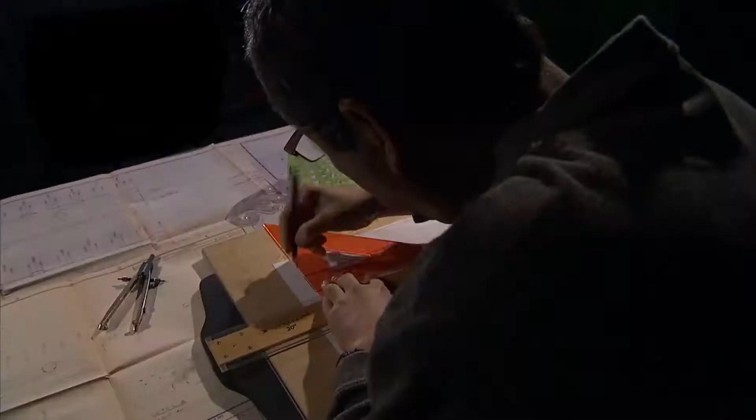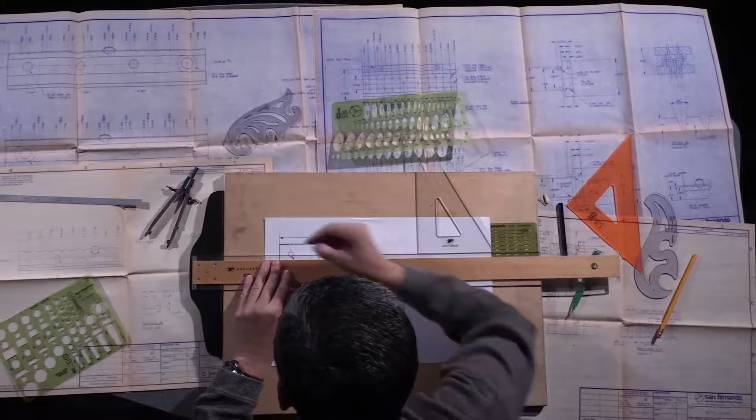Back in 1980, my mother wanted me to have a career, and I just didn't know the path to how to go about it. So what she did is she paid for me to attend a vocational school of mechanical design and engineering. Although not an engineering school, it taught me the basics on how to do mechanical drawings.

My name is Kelvin. I was born in El Salvador, Central America. My father came from China. I'm a total mutt. In El Salvador, they had the Civil War. My mother decided to bring my sister and myself out of El Salvador to live in New York for a better life.

Once I broke the news to my mom that I work in NASA, she was incredibly very excited.

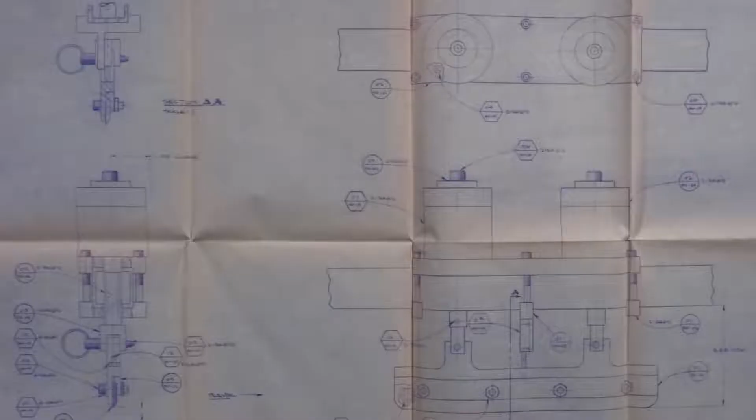I remember one of my professors saying that a drawing is a means of communication between an engineer and the fabrication shop. Good morning, sir.

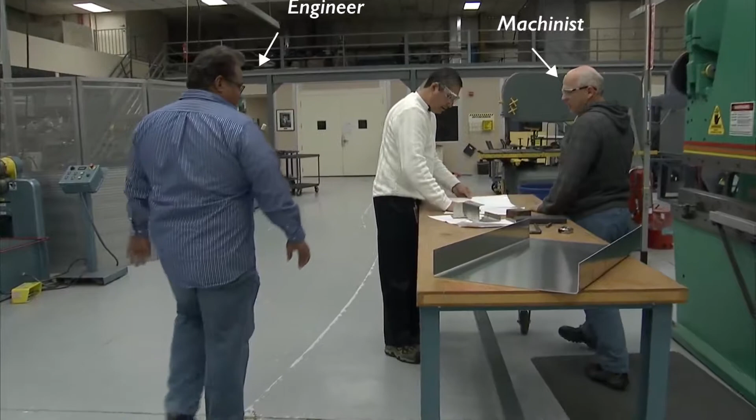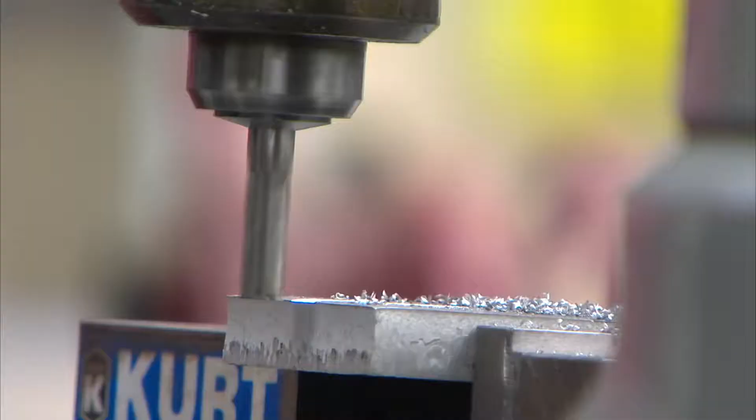My job is to make sure that we speak the same language, that it is clear and concise, and also that the engineer is clear in his intent of the design, and that the shop is clear in what needs to be produced for that design.

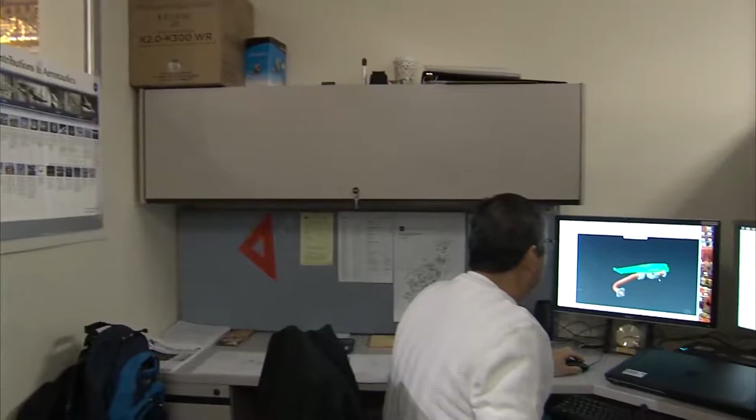The drawings that I produce vary here. Some are cabinets that go into the airplanes. Others are just fixtures that go outside. In this particular project, this is a fuel line meter that is going to be put into the G3 airplane for the flex wing. It measures accurately how much fuel it uses at any given time it goes up in the air.

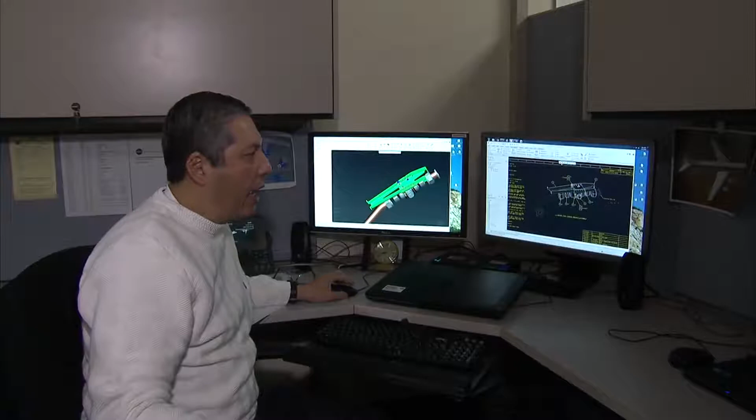The engineer designed the bracket. Once he did the 3D CAD model, he gave it to me, and I produce all the drawings on this side. My responsibility is not only to do the drawings of the assembly with the bill of materials on the side, but also do the parts, every single part that is to be in that drawing, and dimension it and make sure that everything is correct.

An engineer will do the design. After he completes the model, he will give me that model, and I begin putting all the parts into the drawing, doing the dimensions, making sure that it matches the NASA standards and the ASME mechanical standards. After I am done with the drawing, I return it to the engineer to be checked.

Once a drawing is approved by the engineer, I send the drawing to configuration management. They do a couple of things. One is that they will release the drawing into the system so the engineer can write a work order to have the design built by the machine shop. Second, and very importantly, they are the single repository for AFRC, where they put the drawings and the CAD files into their system for safekeeping. If an engineer later needs either the CAD files or a copy of the drawing, they will call them to get a copy.

A typical day here when I come to work is I come in at 7 o'clock. So back to the 3D. Usually on Tuesdays, we have a meeting at 8 o'clock in the morning with my manager just to review all the projects, where they are, where they're going, and what the due dates are.

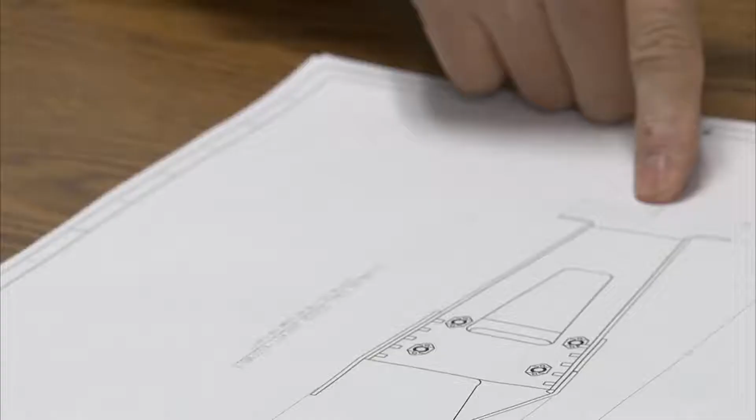All right, Kelvin, what do we got here? Okay, so we get this completed here. So we want to take a look at it. It's going to be passivated. I put this overall dimension here. So, but you want to know more dimensions between center holes. Or just from horizontal? No.

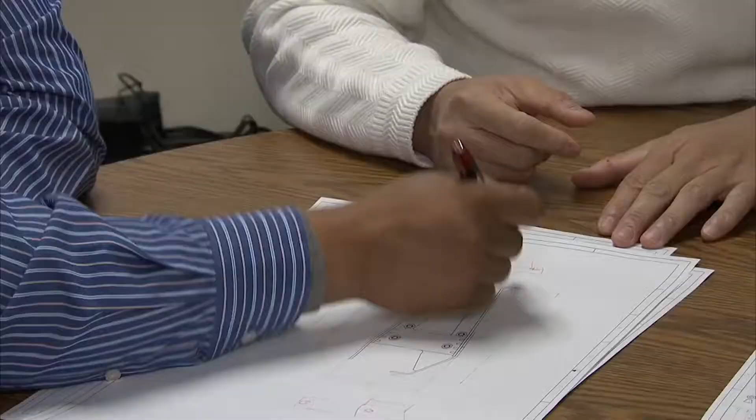After that, I just go about my business of working for the engineers and working on their projects and making sure that the timelines are met.

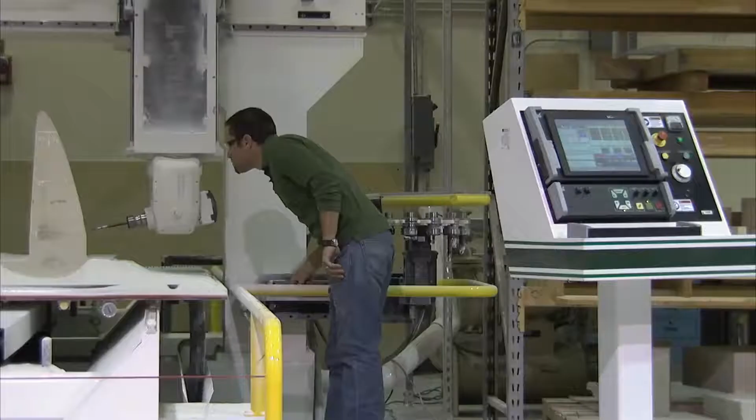What I like here that is different from the private sector manufacturing is that every piece we make here in NASA AFRC is a prototype, it's one of a kind, and I truly enjoy that. One reason is because there's only one of a kind. And second, because it's not mass produced, therefore we put the best of our minds and mathematics into it to make it a reality.

All right, Kelvin, so I'm going to show you the primary locations where it's going to connect. So if you look right there, the harness. So let me go real quick right up here. Basically, we're going to connect from that screw to this screw right here. Oh, okay. So now I see these two points.

As I work with the engineers here in AFRC, it is very nice and brings satisfaction, not only to see their personal designs that I do the drawings for and check, that I have some kind of input, as small as it may be, but to see it going into a plane and doing research, because I know that research is going to convey something to the scientific community and reward humankind in a positive way. Knowing within me that I made a real difference, albeit small, but a real difference.

One of the main points that I appreciate from doing design is when I see something like this. When I began my career, it was all done on paper. There were no computers or CAD models. So my appreciation is all the curves, there's no flat surfaces, everything has an in and out, everything is just flowing. Now that we have CAD, we can do that. But in the past, all this was done by pencil and paper.

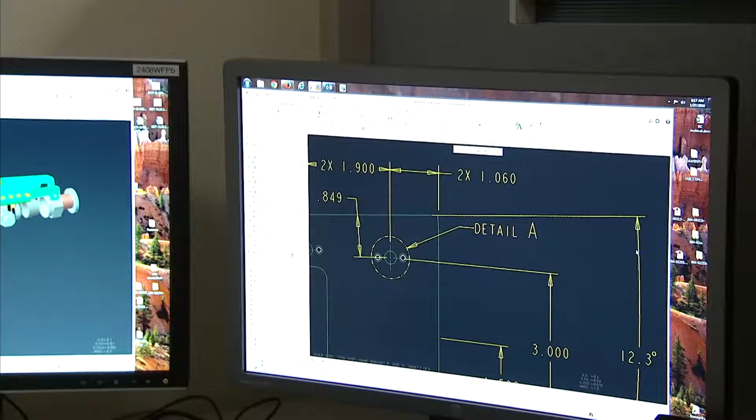There is a pride in it, knowing that as I go to museums and see NASA, and they talk about NASA, inside I always tell myself I work there. And I'm so thankful to make a difference as many others do. I find it very fascinating to be here, and I have learned a lot.